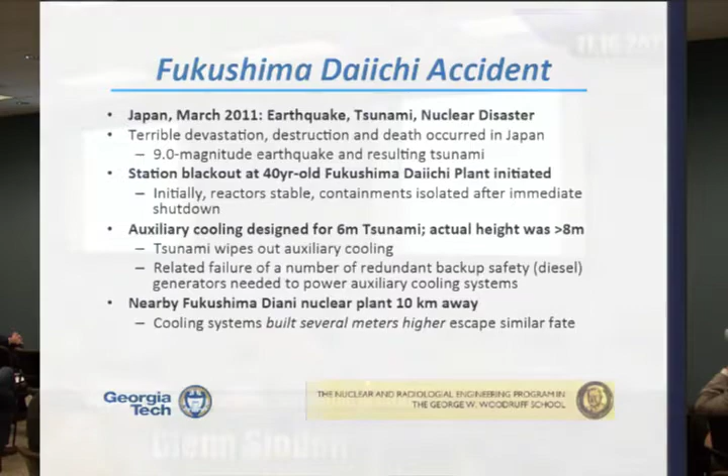So you didn't hear anything really about Fukushima Daini, which is, again, just down the road, because the Daiichi plant was actually nearing its scheduled retirement phase, and it was viewed at the time that they didn't want to upgrade because it was supposed to be such a remote event that they didn't think they would need it. Obviously, hindsight is 20/20. And it's easy to armchair this, but in any case, this perfect storm of events led to some catastrophic failures in the reactor systems.

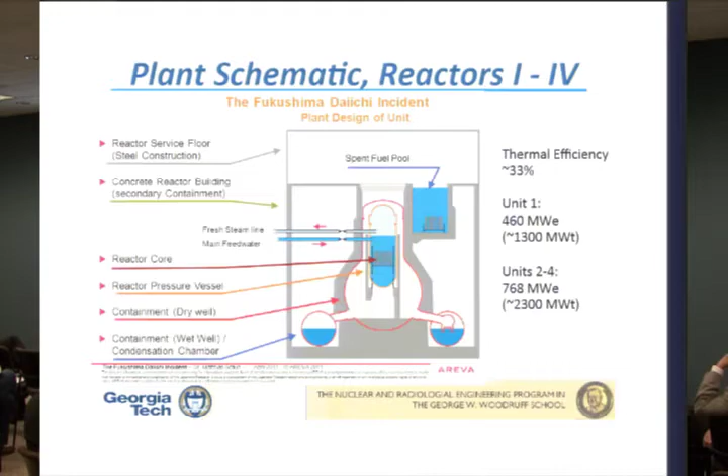And I put this slide in not to really launch into a technical discussion on GE BWR Mark 1 containment, but basically we're storing our fuel in the spent fuel pool at the top of the plant. It makes it easy because you take the head cover off the vessel, and it makes it easy to get to. It also causes real problems if you're not able to dump your waste heat out of the building, as happened. So we had a problem with elevated temperatures in spent fuel pools, and these spent fuel pools are not in a pressure boundary like they are in the core. So a lot of questions have now been generated about the status of these particular plants and how they're designed.

The good news is the plants are pretty robust. The bad news is they did have failures and they did have issues. And the other thing is that these plants are fairly old, and there are not that many of them out there at this time. A lot of them have been closed, but they still do exist, and they are nearing their end of life. And there's probably more to come from the NRC. The NRC has been pretty much swamped since March to reformulate and reevaluate and look over a new policy on how these plants are managed.

So the lack of active pumping led the nuclear fuel to be uncovered. You have this problem because we like to use zirconium in our fuel rods because the zirconium doesn't absorb a lot of neutrons, and it's a really good metal for containing that nuclear fuel. It's basically the primary pressure boundary. We do have fission gases that are produced. I'm not sure if a lot of people realize there are gases that are produced that are radioactive, and they're contained in that fuel rod.

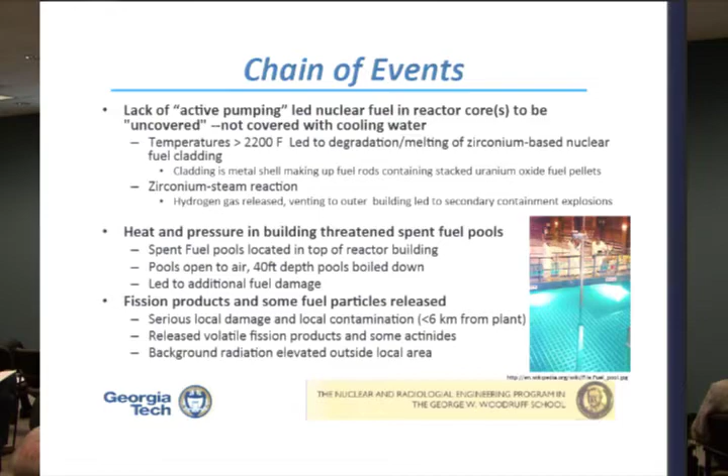The other thing about fuel design is how can we redesign the fuel to avoid this kind of scenario? Are there other alternative materials we can use to do the job of the zirconium cladding? But the problem you have right now is not so much solving the material problem, it's making sure that the reactor is designed in a manner where if you set up natural convection cooling, you don't have to enter into this because the temperatures never get that high. In this case, it did due to, again, the calamity of events that occurred.

The other issue is this event and all the subsequent events going on in Japan gave pause to folks who are in charge of spent fuel in the United States, where we have probably 5-6 cores worth of nuclear fuel racked in our spent fuel ponds, basically because the government has failed to identify a waste policy where the utility can send that fuel for ultimate high-level waste processing and/or disposal. So it caused folks to actually rethink this and say, okay, we really do need a better policy on this.

One thing I thought I'd clarify, just because there's a lot of discussion about decay heat and decay heat removal and what it is. When you shut a reactor down, I have a metric here, if you've been running your reactor for about an infinite amount of time. This assumes a long operation, so near infinite time. When you shut the reactor down, 4.7% of the reactor power is still coming out 10 seconds after you shut off the reactor as decay heat and delayed neutron effects and other things.

And so even after 10 days, you see there I have 0.3% of the original power coming out as decay heat. So the decay heat is an issue, and most fuel has to be cooled for several years after it comes out of the core if it's gone through what I would call an average burnup in doing its job. And you have to keep this cool. There's no way to turn that heat source off. It's Mother Nature decaying chains of progeny of radionuclides that give off heat.

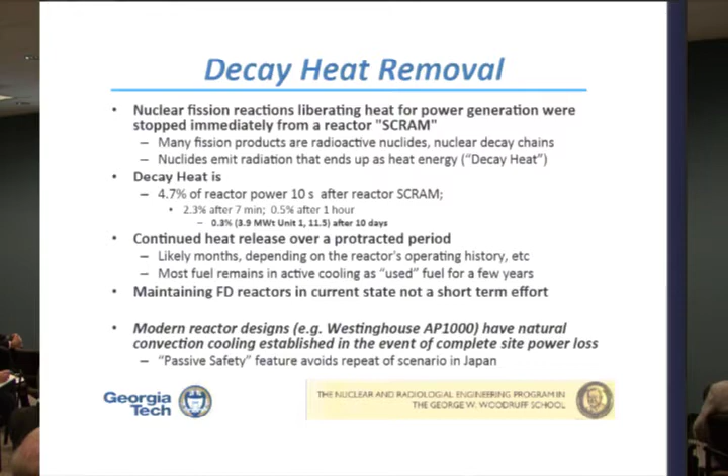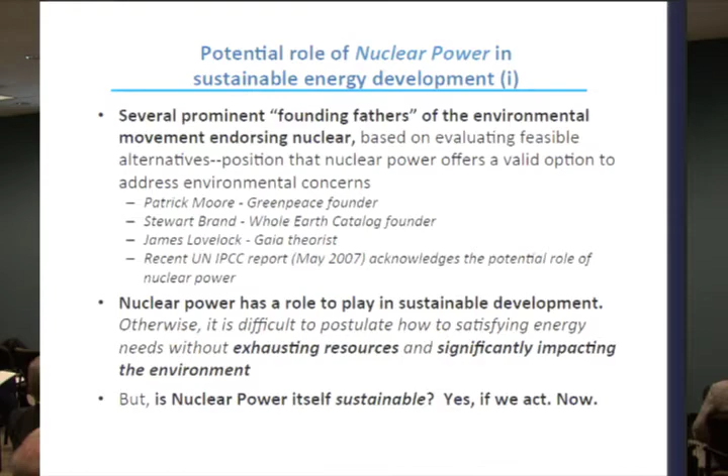So, the potential role of nuclear power is an important one in our energy policy. Right after the Fukushima Daiichi accident, CNN called me and asked me if I would write an op-ed piece. I don't know if you happened to see it. It's still out there on the web, and the title of that article is The Necessity for Nuclear Power. I addressed a lot of the issues that I talk about today, but I also addressed several key points about nuclear energy compared to fossil fuel energy. And there were several prominent, quote-unquote, founding fathers of the environmental movement that have endorsed nuclear and have since renewed their endorsement even in light of the Fukushima accidents.

Nuclear power has to have a role in our sustainable energy development, but is it sustainable? Well, yes, it is if we make the right decisions regarding it, and there are several. It's a good solution overall for our energy needs. It has very high energy density. With 50 years of nuclear operations, you could take all that nuclear waste, they talk about mountains of nuclear waste, and it would just fill one football field about 20 to 25 feet high for 50 years of high-level waste. If we reprocess that waste, because 95% of the fuel is recyclable, you would get that 50 years of high-level waste volume down to just the end zone of that football field.

So it's an important issue because it's high energy density, and if you do it right and you don't use 40-year-old plants, and we've come a long way in 40, 50 years, I believe it's a smart way to go. Now, smart site location is important. I think it's probably a really good idea to not build these things on a fault line. That seems to be pretty common sense.

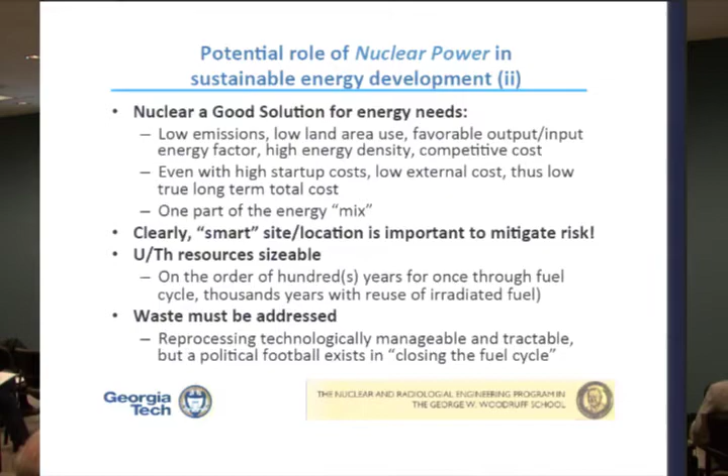Uranium and thorium resources are also sizable, on the order of 100 years. But clearly, and I'll be the first one to admit, the waste issue needs to be addressed. Now, what's interesting is Japan, Russia, France, UK, everybody has closed their fuel cycle in some manner by recycling their fuel, everyone except us. The latest folks to involve themselves in the recycling push are India, and they're an emerging nuclear power because they have a lot of power to provide.

But we need to address the waste, because if you don't recycle, you start piling this stuff up. We have currently around 65,000 metric tons of waste. That's enough to where if we built a pilot plant, that pilot plant would be busy for about 30 years based on the current stockpile we have.

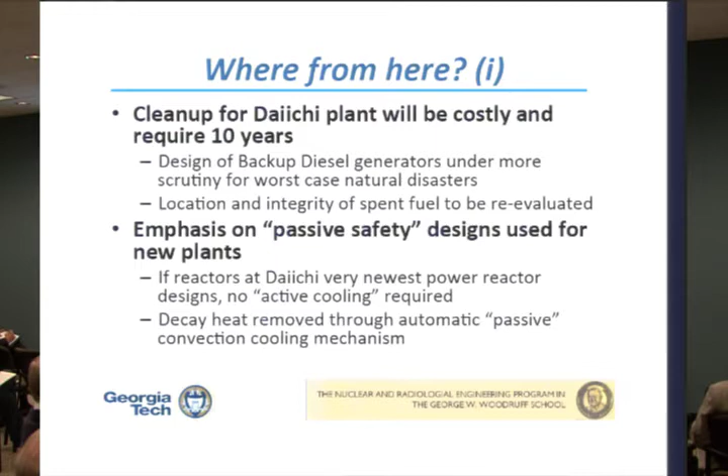So where from here? Now, spin back for a moment: cleanup of the Daiichi plant will be costly, and I've looked at some estimates, and it's around 10 years to clean that site up. It is a mess. You take 4 nuclear power plants and you really do a number on them, and that whole site is going to be a mess for about 10 years. Design of the backup generators is now under a lot more scrutiny by NRC, even for anything in the U.S., just because. And again, this emphasis on passively safe designs, as they're called, are now in the forefront.

But energy use is growing by 19% in the next 25 years. We're going to be competing with, we're already seeing it, China, India, others, rapidly growing economies. So despite the hype in renewables, I really love renewables. I think they're great. But we do have to be realistic about renewables in that the current upper limit is that they could provide around 20% of our energy demand needs. So 20% is a small number.

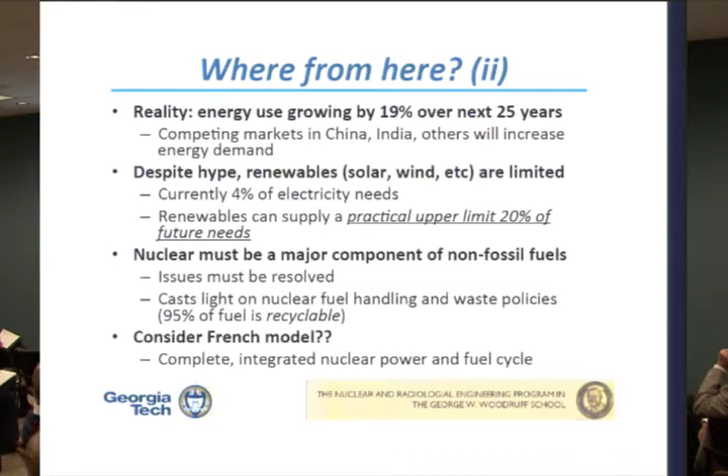And if you're not going to burn oil or coal, you're going to need something that's not going to contribute greenhouse gases. And nuclear, therefore, must be a major component. But we need to take a hard look at making the fuel recyclable. And as I mentioned, I spent a pretty good time in France working with their French electric utility. And they have basically a complete and integrated nuclear power and fuel cycle. If you talk to them, they just said, this is how we do it. 85% of their fuel is currently reprocessed.

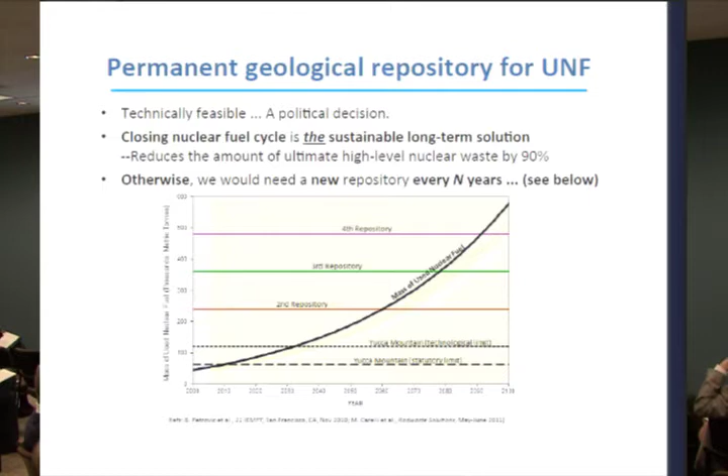Now, let's say you don't want to reprocess the fuel and you could talk folks into a repository. Let's say we're going to dump all the fuel into the repository and just keep it there after it's used once. You're going to need a new repository. One Yucca Mountain is not going to be enough. You're going to need several Yucca Mountains over a very short period of time. You see that in this graph. And the takeaway from this is you have to close the fuel cycle and recycle that fuel and recover that 95% that you can put back in the reactor. It makes no sense not to.

A study was done called ExternE. It was performed by the European Commission, and it basically examined the true cost of energy, because for all the folks, I think coal is great too, but the problem with coal is, we talk about nuclear waste. The waste for coal, well, you're all breathing it, we're all eating it, and the government guidance on why you're not supposed to eat so many fish is because you have mercury in the fish, and some of that mercury comes from burning coal. So the waste is distributed across the landscape.

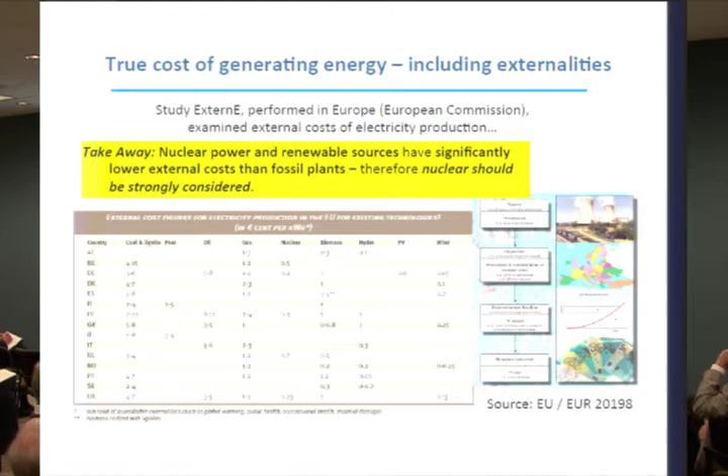Coal is coal. There is clean coal, but really, there's no such thing as truly clean coal because you always have some emissions. So every energy source has an operational cost. You have to accept the risk and cost that comes from each energy source. But they did a study anyway with the European Commission and found that nuclear has significantly lower external costs relative to the other energy sources. And I reference this table. You can go look up the ExternE study.

So long-term needs and necessary actions are we need to reduce the U.S. backlog of waste. We need to try to avoid the change of direction every 4 years. It seems to correspond with the election cycle. And we do need a comprehensive strategy. And I participated in feedback to the President's Blue Ribbon Commission on energy and nuclear energy policy.

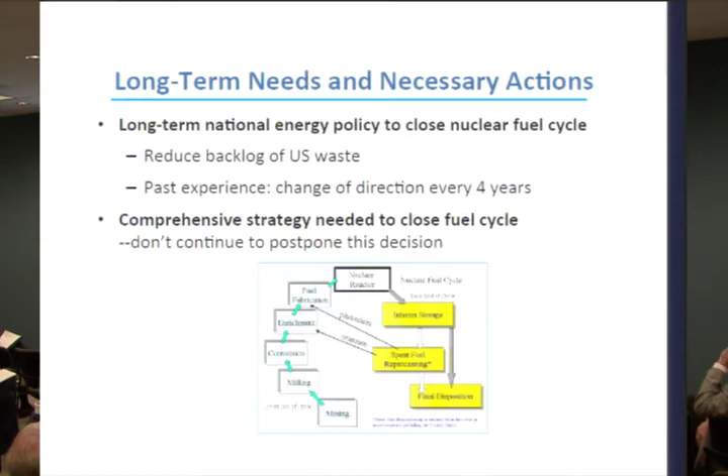And we gave many of these recommendations because they asked Georgia Tech for its feedback from academia. And actually, we're pretty familiar with the industrial needs in the nuclear industry. Long-term needs are the biggest. The long pole in the tent is not really technical. It's all political. We just have to make a decision.

The other problem is 50% of all the nuclear professionals that currently support the current industry will retire in the next 10 years. Half of our workforce will be gone. Therefore, we need to really crank up our output of engineers and scientists who can manage even just the current resources without the current growth that we say we need.

So, in conclusion, we need nuclear plants to take the place of future plants to provide non-fossil energy needs. We need to be smart about where we put them, no question. We need to use the passive safety design component. We need to close the fuel cycle. We need the government to step up and make that decision and firmly carry through with it.

And lastly, we really are in critical need for nuclear education just to provide the nuclear professionals to even service the current industry because of the massive retirements that are going to be going on in the next 10 years. And that's part of the reason why I went to academia. I did retire from the Air Force. I was a lieutenant colonel in 2004. I retired. I am older than I look. But I went into academia to try to solve this problem of nuclear training because it's a big issue.

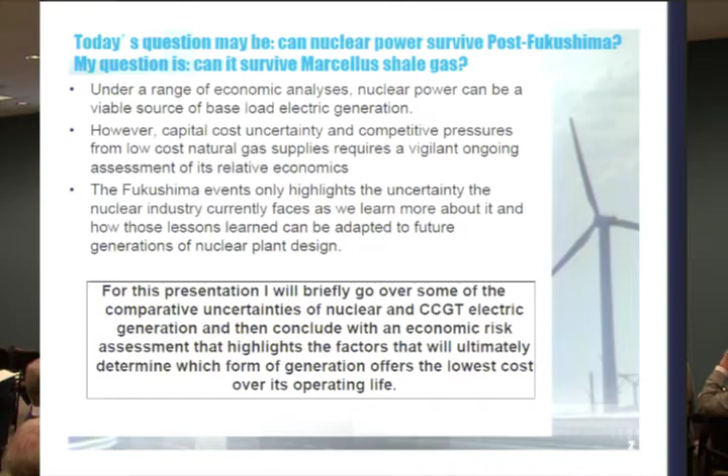One thing that we're looking at is, will the nuclear power industry in the United States survive the post-Fukushima events? And really I'd like to turn that around, because I think there's a more immediate issue, and that is, if you're from the perspective of a supporter of nuclear power in the United States, can it survive the Marcellus shale gas?

Shale gas has emerged. For many years before shale gas, our proven reserves were declining in the United States, such that for the volumes of natural gas, we were talking about 20 years in the future. I mean, literally 20 years from now, we could be out of natural gas. And that number is now well over 100 years, depending on who you're talking to. And that's because of the technological advancements that have made it possible to extract large volumes of natural gas reserves that we have in areas that were once very difficult to retrieve in an economic way. So we're going to talk about that, because that is a game changer. And that's really recent. Now, I've been in the business for a long time.

And I'd have to say, I'm dealing with this topic every day. And if you asked me 5 years ago, did I ever hear of a Marcellus gas field, I would have said, I just don't know what you're talking about. Or learning about the technology, because I'm not into mining or fuel extraction methodologies, but now all of a sudden a lot of us know about these methods and what they call fracking, and we're learning a bit also from a layman's point of view that it has an environmental impact and environmental cost that hasn't been fully internalized yet.

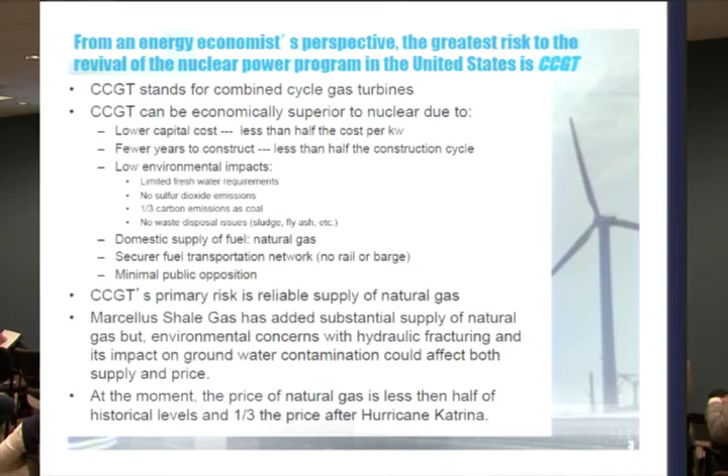Whereas a nuclear plant today could be anywhere from $4,000, $5,000, $6,000 a kilowatt, a combined cycle is anywhere from $1,200 to $1,400. Pardon me? 1,000? Well, okay. Well, anyhow, I'm from the Northeast, so the costs are a little more expensive.

It takes fewer years to construct. You can literally go from the planning stage right through the completion stage in a couple of years, whereas nuclear, between the regulatory process and the construction cycle, could be 8 years, maybe even 10 years. While it does pollute, it has no sulfur emissions. It has some nitric oxide concerns, although those are local and those are controllable. And it has carbon dioxide emissions, but it's about 1/3 of those produced at a conventional but highly efficient coal plant. So it's pretty low. It's not totally gone.

There's no waste, no fly ash or bottom ash that comes out of the burning in a coal plant. Our supply of fuel is substantially, when I say substantially, it's probably 90-some percent, maybe 98%, except for some regions like in the Northeast, Boston area, domestically produced as opposed to LNG, which is liquefied natural gas that's imported. And with Marcellus not only being vast quantities, it's located closer to the areas that need it most. So until the infrastructure is placed, it's a little easier to get to.

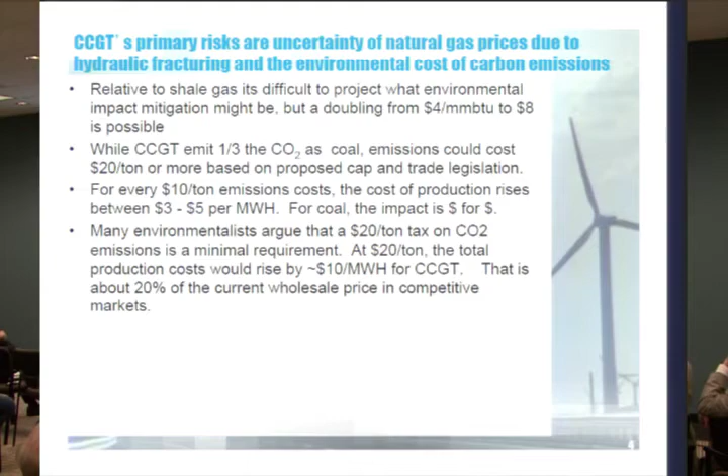Entergy and Exelon are both major owners of nuclear plants and would gain financially if there was a carbon tax or cap and trade type of protocol that priced out the value of carbon dioxide emissions. In other words, if you emit, you have a choice, either control it or pay for it. And so there's a group of utilities that tend to own nuclear plants that are in favor of stricter regulations because the value of their assets grows. And then there's a group of utilities like AEP and Southern Company that have a fair amount of coal, and they favor a more moderate or mitigated approach towards cap and trade.

Well, that's a big issue. A coal plant, and I'm going to throw some numbers out at you, but it just works out nicely, has an efficiency, and we measure that in a heat rate of about 10,000 BTUs per kilowatt hour. You don't have to remember it, and it's not really a good cocktail party statistic. But that translates, if you had a competitive market, into about $1 per megawatt hour of production costs for every dollar of carbon tax. So a $20 tax, which they're talking about, would be $20 per megawatt hour for a coal plant. Well, in a market that's around $50, add 20, that's a lot of money. That's 40%. It drives the economics for a coal plant. So the carbon issue is a big issue, and we want to take a look at it and be careful.

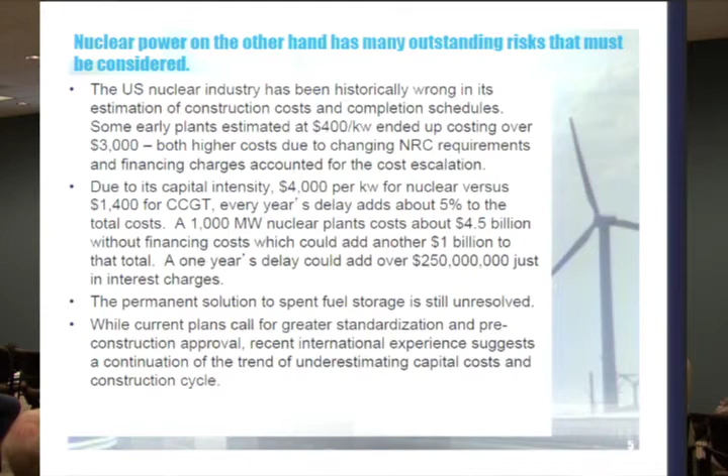That's just one event. Then we had the earthquake out in the Virginia or Maryland area, which, just as a point of reference, I just got a call this week. My skylights in my office, I have a home office in New York, the inner glass shattered and split from the earthquake. Now that was felt in Albany, New York. That was a pretty heavy earthquake.

We know that the nuclear facilities in that area were not designed for that level, although they experienced it; that doesn't mean they experienced minimal damage. But the fact of the matter is we're learning a lot of things. We have the events over in Japan. We have an earthquake on the East Coast that we never thought would be that large.

How that influences the cost of building the plant, I don't know. But I don't think it's going to go down. I don't think these events are going to say, geez, we overbuilt and we can cut back. So I don't think so.

Because of the capital intensity of nuclear plants, it costs a lot of money. The two Vogtle plants are going to be about $16 billion. And it doesn't take a financial analyst to realize that if it's costing you 5% interest a year, I'll give you a low number, 5% interest on a multi-billion-dollar plant, then at the end of the project, if I have a 1-year delay, it could cost me, what's that?

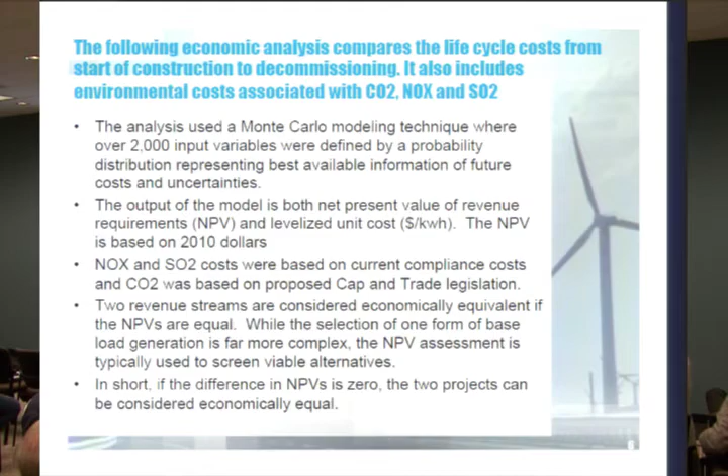Net present value is all of the costs that go into the design, the building and the operation of the facility over its lifetime, and it's all added up. It's discounted by the escalation of rates, back to, in my case, 2010 dollars. It's overly simplistic, but from an economic perspective, if I have two choices and they both have the same net present value, then they're economically equivalent. If one has a higher net present value, then it is more expensive because I'm adding up all the costs.

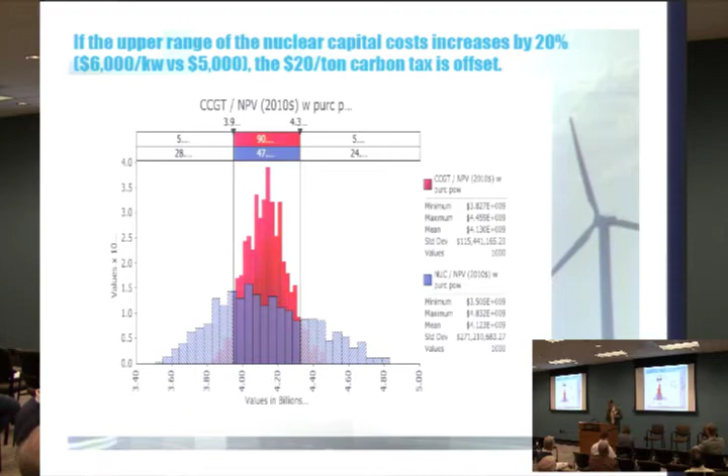So the point is, just to finish up here, that there's a bunch of uncertainties. I only looked at two things: capital cost of the nuclear plant, which might be reflective of some of the things that the industry is facing because of the Japanese events, and then the impact of environmental concerns on combined cycle.

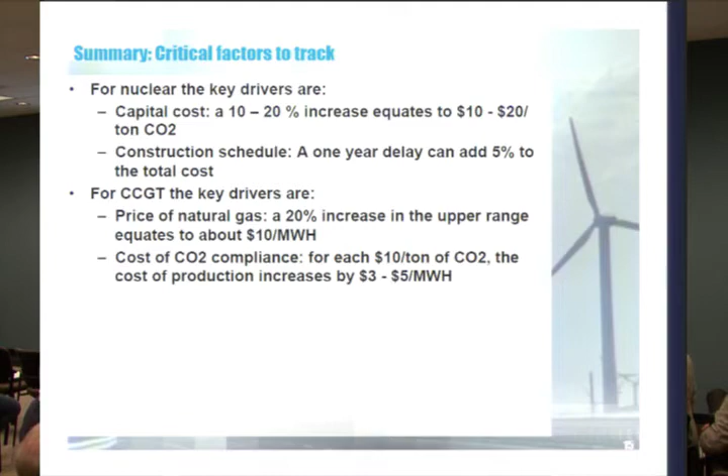So unfortunately, I left you with which one do you choose? And that's the industry's problem right now. We don't have a clear-cut answer. And depending on how you look at it, that's why we probably want a portfolio, so that if we're going to make mistakes, we'll at least be spread out over a range of options.

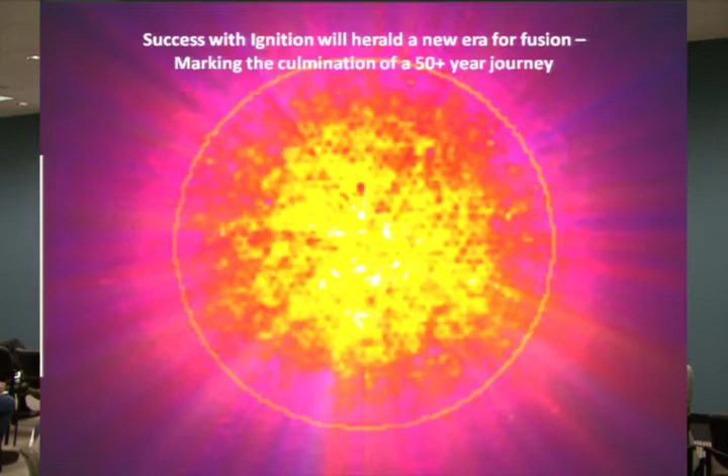Now, folks going after fusion, success with ignition. You have fusion, and ignition is when it burns by itself for a certain amount of time and creates all this heat, should be the culmination of this long journey between studying lasers and studying fusion energy. And so it looks like we're on the threshold.

If we look at the number of experimental facilities, there have been about 6 up to this point, leading to the build of the National Ignition Facility out in Lawrence Livermore. Now, its sole intent is to accomplish ignition and then have further missions on stockpile stewardship. So this came out of a defense program, as many technologies do, as well as astrophysics and other types of sciences.

Now, this has flown under the radar screen. I suspect many of you may not even have heard of the National Ignition Facility. It has now come to light, gained some notoriety and some controversy by those who are proponents of other types of fusion, like magnetic fusion. Now, the National Ignition Facility went operational in 2009. And it routinely, 1-2 times a day, achieves fusion.

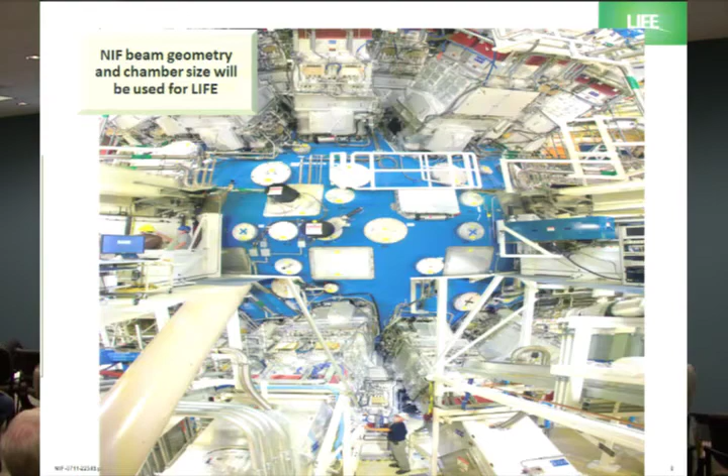And so people said, when I started this project, it'd never be done. And then if you visit NIF, you'll see the 7 miracles, scientific miracles, technological challenges that were addressed to create this facility. All those little portholes around it are instrumentation, measuring time of flight of neutrons and X-rays, pictures of the shot. We call it the shot. And we shoot the laser at the target.

In the center of that target chamber is the target. The target is about the size of an eraser. Obviously, this is magnified. Inside that target is a little sphere, about 2 millimeters in diameter, that contains the fuel, deuterium and tritium. So the trick is, the recipe is, put it in an oven, heat it up to hundreds of millions of degrees, and then create a pressure of hundreds of millions of atmospheres, and then you have fusion.

Now the way that is achieved, and I'll show you a little video here, you'll see this thing you hit by the laser. This is an oven. Right now it's made of gold. University of Rochester, the Omega site out there, laser has demonstrated that lead, cheap lead, even oxidized lead, is a better oven. When I say an oven, the laser hits this, heats it, X-rays are generated.

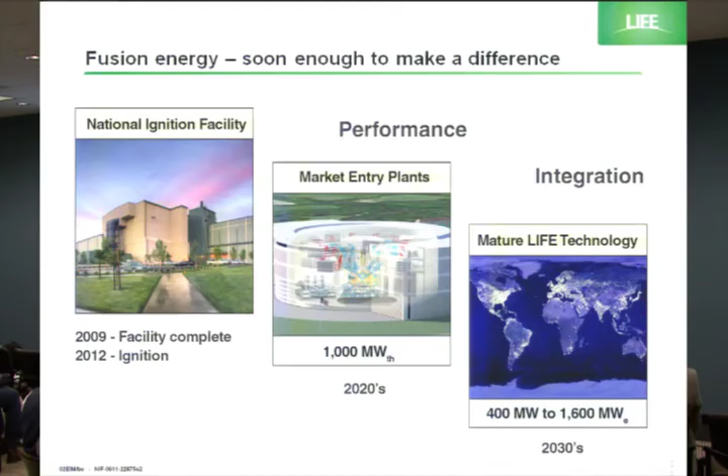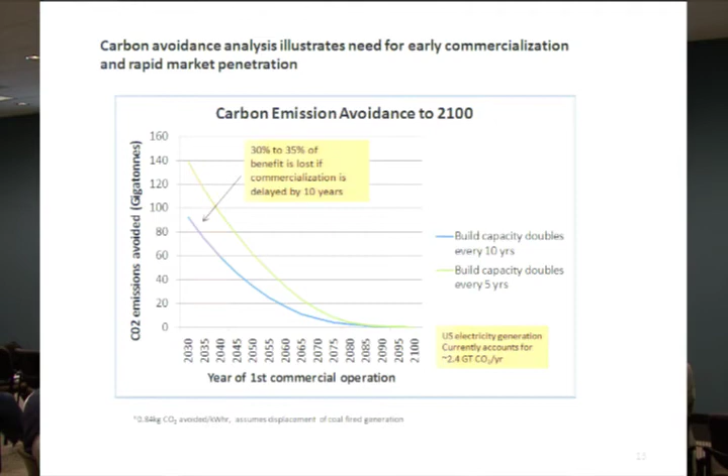Now, at some point, we've got to figure out what's attractive to the end users, which are the people, the NGOs, as Glenn mentioned, Stewart Brand and the Whole Earth Catalog, others. Well, we formed an advisory board, which I'm a member of. We're made up of CEOs, past CEOs, current CEOs, executives, and former executive regulators from the NRC. And so these were the things they wanted to address. They had all come out, toured the facility, gone through the design presentations, looked at the conceptual, and said, hey, we're on board, but this is what has to be delivered.

EPRI has been chartered by an ad hoc committee of utility executives to do a study of the different fusion technologies and look at who's going to be first to market. And hopefully we're going to come out okay on that. We also talked to the vendors. NIF was built at about $4.5 billion, built over 10 years. And it won the International Project Management Award, even though it was a government facility, coming in under time and below budget.

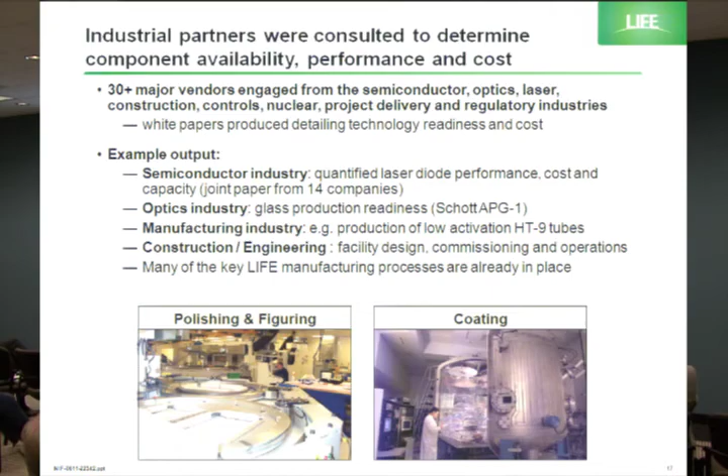The semiconductor industry, a number of vendors have done studies of the costing, the industry capacity, optics industry, glass production readiness, manufacturing, boiler tubes, construction. Parsons currently has been working on plant physical design and manufacturing processes. Where we stand right now, assuming ignition in 2012, many vendors have assumed the risk after doing their due diligence, saying, okay, we want in, and we're negotiating joint ventures with the NSSS vendors. Large investors have come to the table and said, we want in before ignition, because then there's going to be the rush. So that's where we are as far as commercialization.

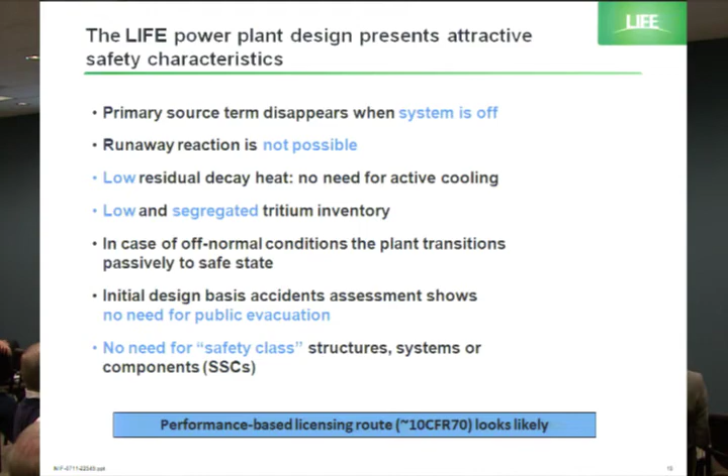But it is not a reactor. There is no continuous nuclear reaction, so a runaway reaction is not possible. Low residual decay heat, not from fuel, just some activation products. Off-normal conditions, design-basis accident, lithium fire, you'll walk away from it. No consequences at the site boundary. Let the place burn down, beyond design-basis accident. So there's no need for safety class components. The other thing, the new plant for commercial application will be smaller than a fossil fuel plant, and some of the CEOs are now studying whether they can replace the fossil plants in their urban areas.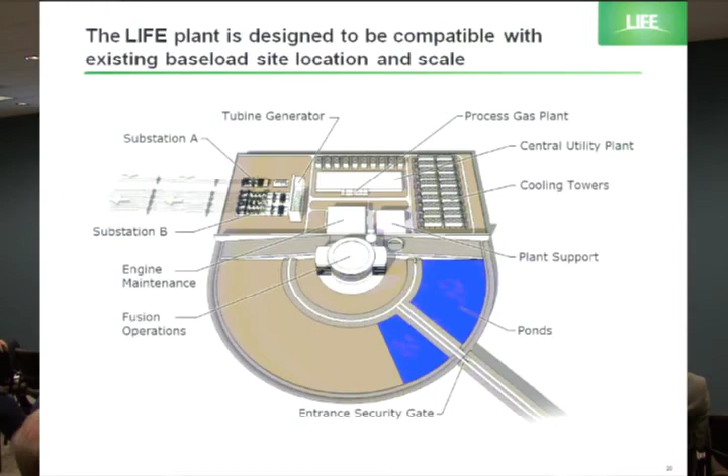Okay, so that's pretty much the story of LIFE that I suspect you're going to hear about quite a bit in the news in the forthcoming year. Again, this will hit the market. It's designed; its train leaves the station early 2020s. Market penetration. There are no safety systems, no safety consequences off-site, and there is no long-term storage requirement for radioactive waste. The waste that is generated is low level. That is 1.5 gigawatts. It is economical from 400 megawatts to 1.5. However, this beast likes to run big. And at 1.5 gigawatts, cost of electricity is around $40 to $50 per megawatt hour.

I'm sorry, the NIF is located at Lawrence Livermore National Lab. If you want to find it and LIFE on the internet, just Google NIF, N-I-F, and it'll come up. Tom Friedman was out there, New York Times writer, and he called this thing the real holy cow game changer. And National Geographic, BBC, and whatnot have been out there recently doing specials.